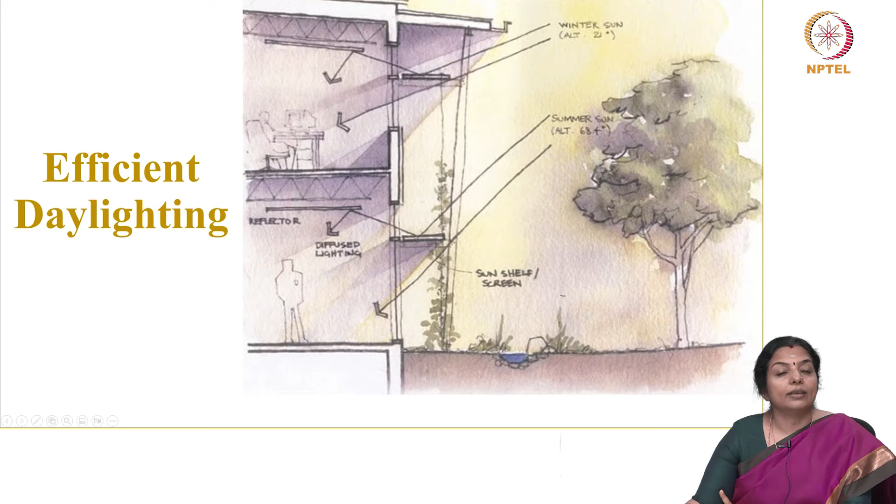Today we will look at some of the case studies in India where the intent of design itself was to provide efficient daylighting. So the first case study that we will look at is the Indira Paryavaran Bhawan in New Delhi. The Indira Paryavaran Bhawan is a 5-star rated GRIHA green building. It is located in New Delhi. It has been designed to be a net zero building and is considered a perfect example when it comes to looking at the latest green technologies.

Almost 75% of the building and its floor space is lit with natural lighting. This reduces the dependence on artificial sources of lighting, and therefore this building becomes a net zero building. The inner courtyard of this building serves like a light well, and this courtyard is provided with a skylight. That skylight is shaded and it becomes like an interaction space.

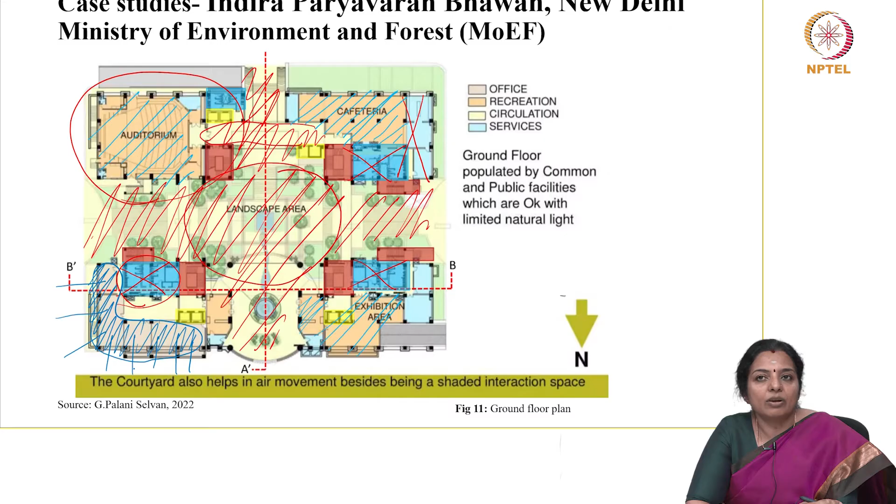Also, they have energy efficient lights provided in the interior as well as the exterior lighting system of the building, and to maximize energy efficiency in lighting, the artificial lighting in the building is regulated by a lux level sensor. The lighting power density is kept close to 5 watts per meter square, which is 50% more efficient than the ECBC requirement on lighting power density, which is 11 watts per meter square. The lighting load, whatever is required, is supplied with the help of photovoltaic cells through a power plant.

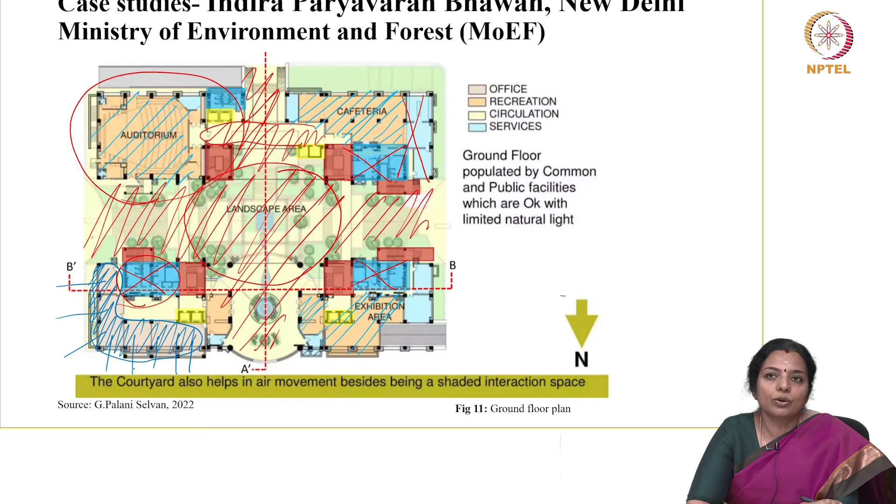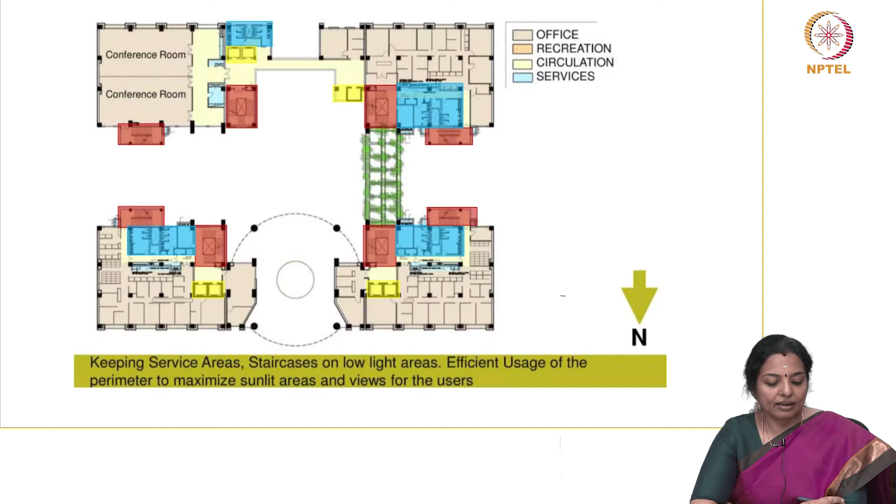This is the higher level, and at the higher level you can see that there are more office spaces and spaces which rely on natural ventilation and natural lighting, and all these spaces have access to the exposed outside wall through which they get natural lighting, and all these are windows through which the office areas get natural lighting. Besides, this is a large cutout here which provides adequate lighting and ventilation.

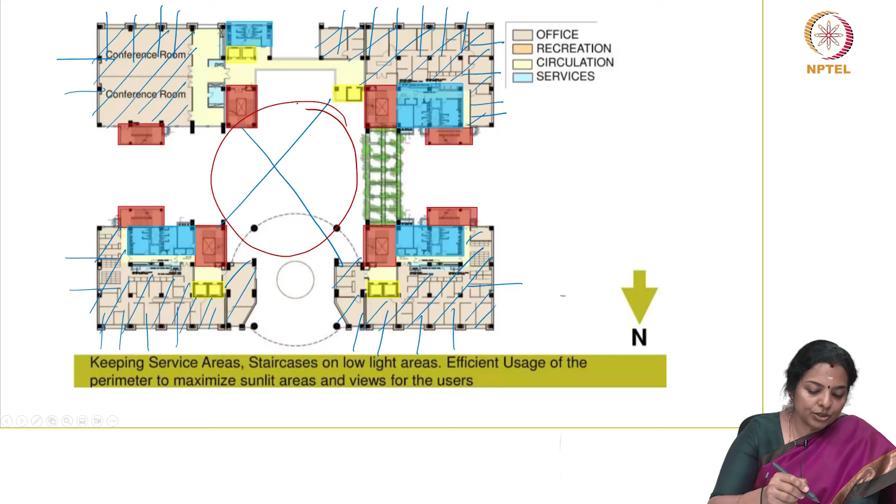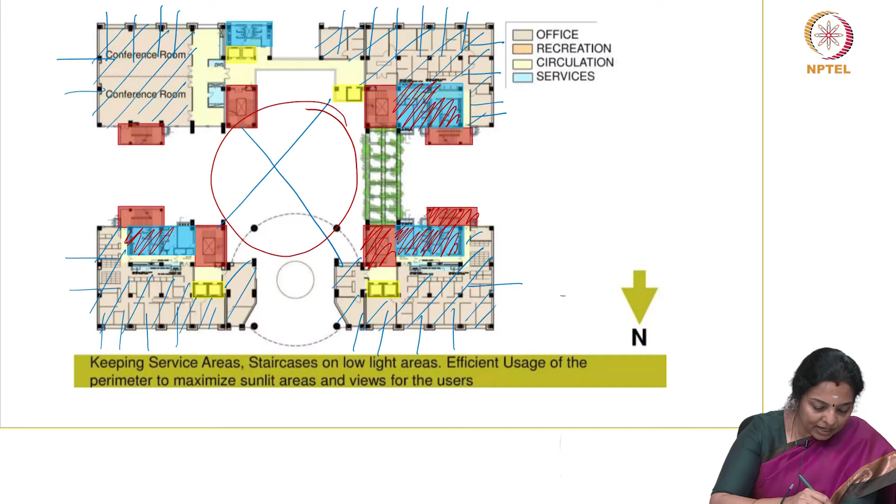This is the courtyard through which all other spaces get natural lighting and ventilation. You can see the staircases and service areas. Service areas are the toilet areas and the staircase areas. They are kept in areas where low levels of natural light enter, which is all right. So this building has efficiently used its outer perimeter, which is a long outer perimeter through which natural lighting enters the building, and therefore it reduces the load on electricity.

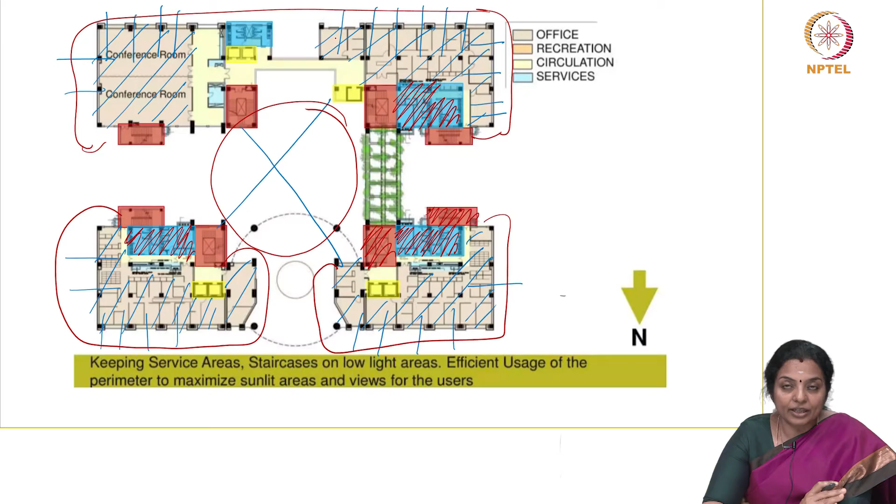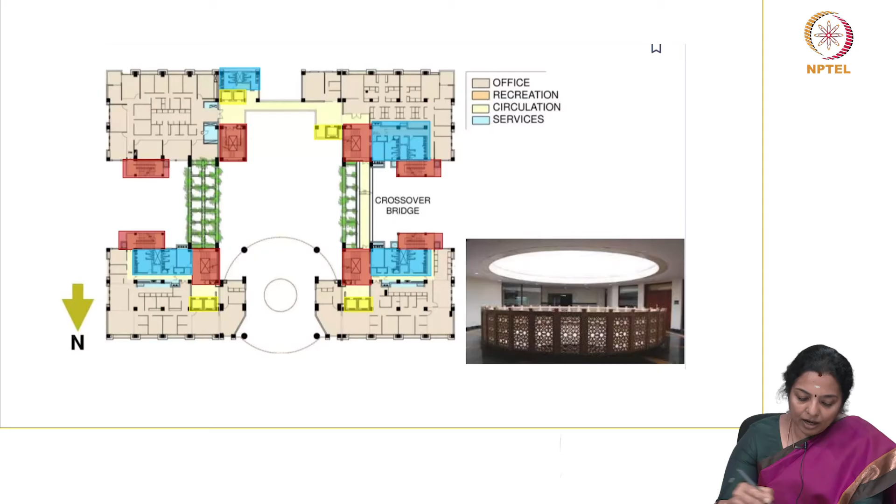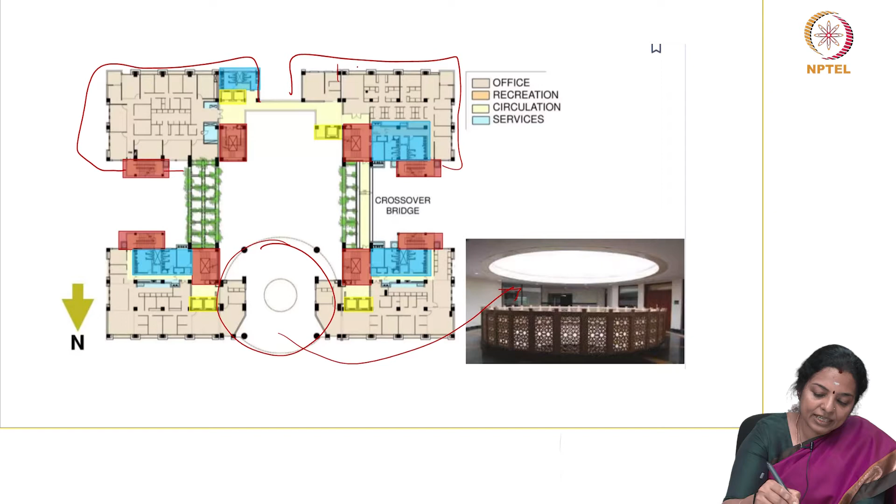On the higher floors, you can see how this area is like a light well, and again here you can see that the long perimeter provides an opportunity for natural light to enter the office, thereby ensuring that the office spaces get lit by natural light and the load on the electricity comes down considerably.

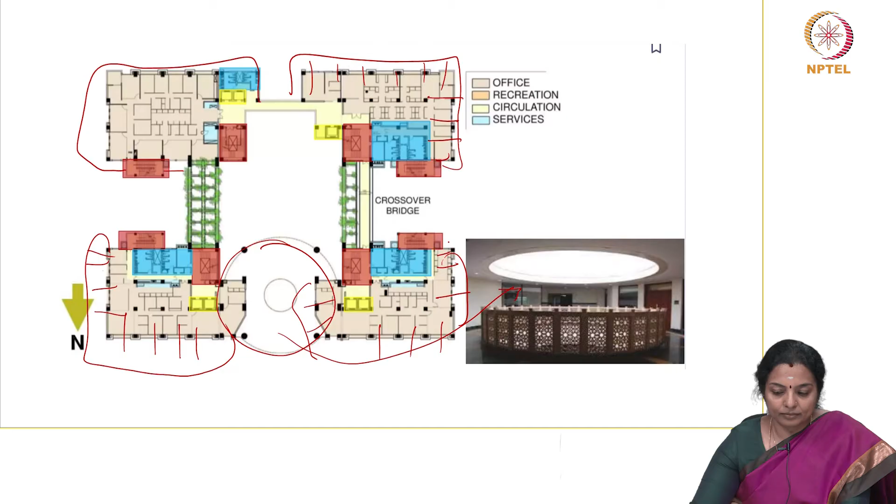Now let us look at the strategies apart from simple passive ones, because with simple passive strategies we saw that the building has a long perimeter which is exposed to the outside, and therefore the office spaces adjacent to those walls get natural lighting. If we look at the planning, we can see that there is a central courtyard and the building is pretty much porous, and this courtyard is provided with a skylight and it provides indoor natural light.

So, the building envelope is designed to ensure that daylight enters the building and at least 75% of the occupied spaces get daylight. So 75% of spaces are naturally lit.

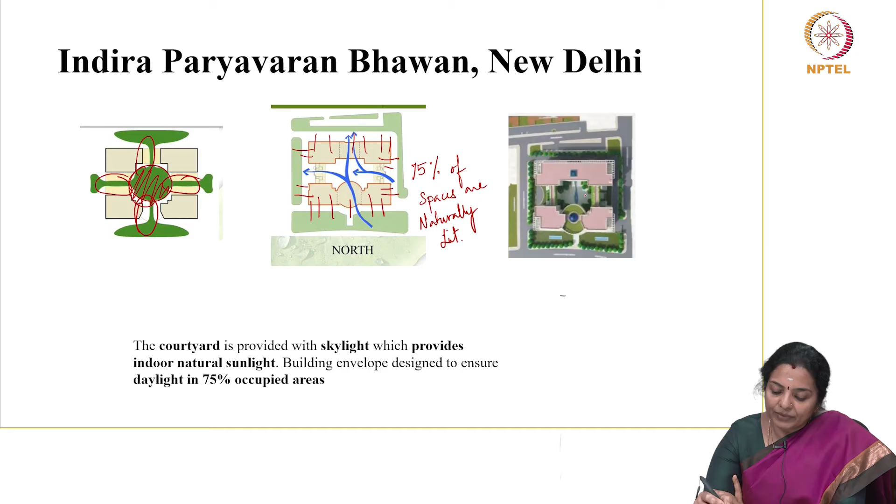Besides, you can see here in this plan that there is this courtyard and there are multiple smaller courtyards here. You can also know that this building has light shelves. We have already seen what light shelves are. This building also has light shelves and it has very simple roof overhangs. So, the roof overhangs are provided, which act as a shading device on the south side of the building.

So, it acts as a shading device and also helps in eliminating glare by cutting off very high and harsh sunlight. So, north facing glazing receives only diffuse light. The light shelves also help in bringing diffused light because it is not direct light but it is through multiple reflection.

The facade has been designed to receive at least 75% of natural daylight inside, and there is use of high efficiency glass. We have already seen what is high efficiency glass in our previous slides. So, it has low U value and it has very high visible light transmission. All these contribute to further enhancing indoor lighting.

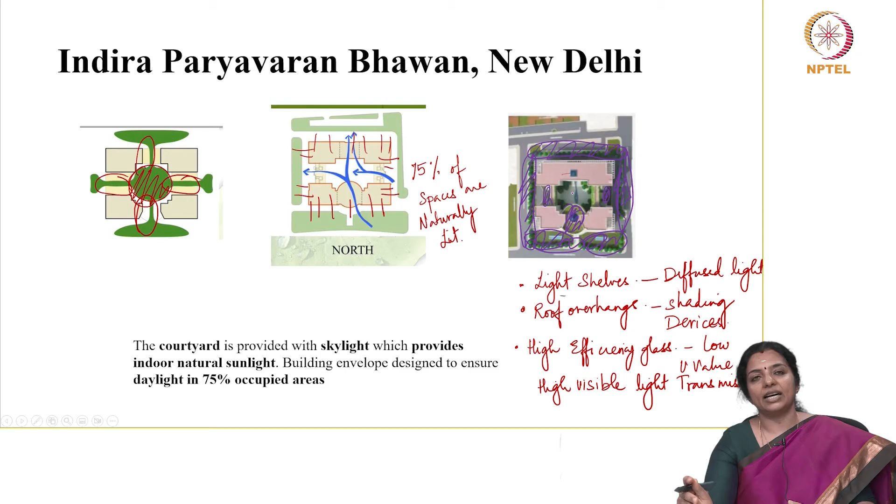Also, the building has very well designed exterior landscaped areas, and having good landscaped areas is very important. The building has very well landscaped areas on the outside as well as any of the surfaces which is not covered, and therefore the intensity of solar radiation is less because it is reflected light which enters the building. Here in this picture you can see the light shelves, which undergo multiple reflection before light enters the building, giving it a very diffused lighting effect.

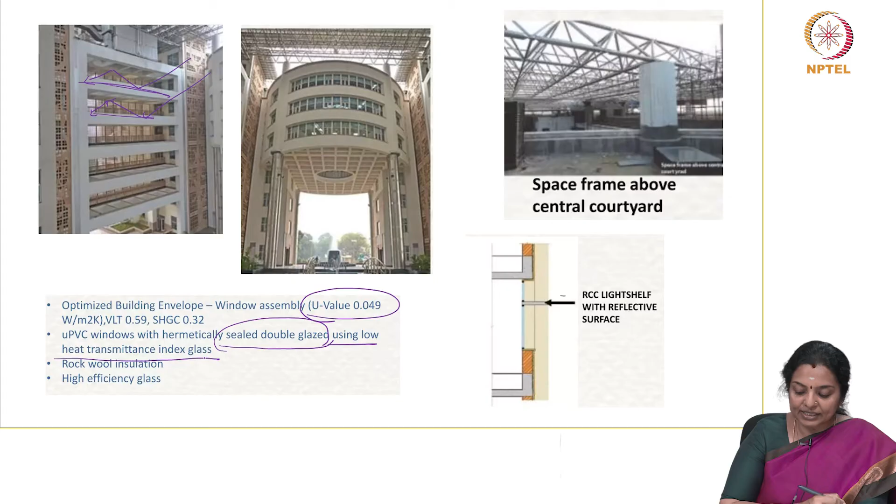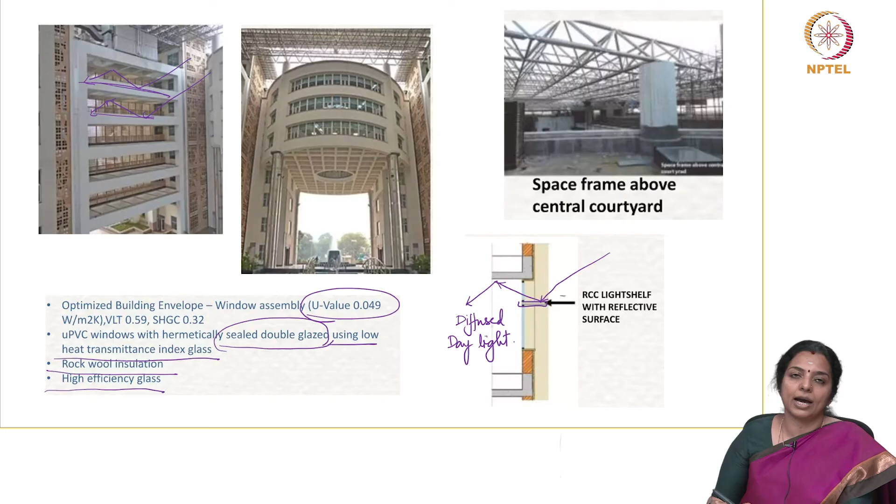Now the building has an optimized building envelope. So the U value is 0.049 watts per meter square Kelvin. And UPVC windows are used with hermetically sealed, double glazed and low heat transmittance index glass. Rock wool insulation is used along with the high efficiency glass, and these multiple light shelves also have a reflective surface which reflects the daylight, and it brings in diffused daylight. As you may be aware, in Delhi the intensity of solar radiation can be very high and the light can become very harsh to the eye if it is not diffused.

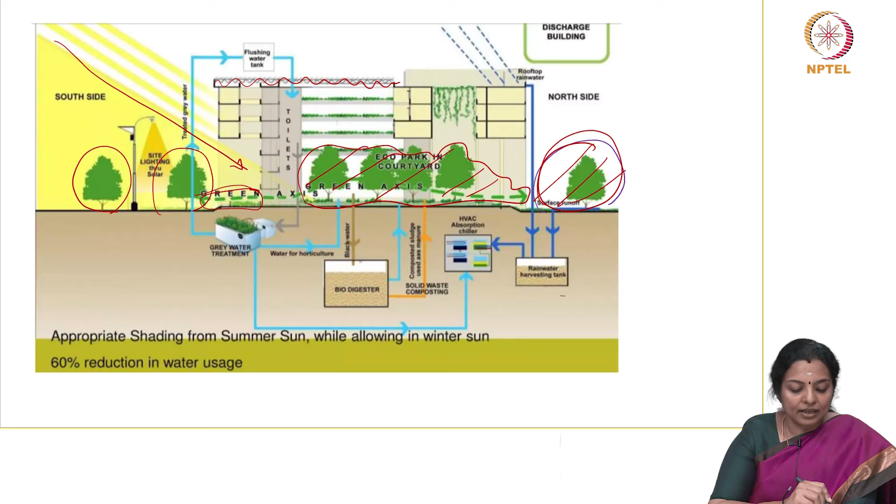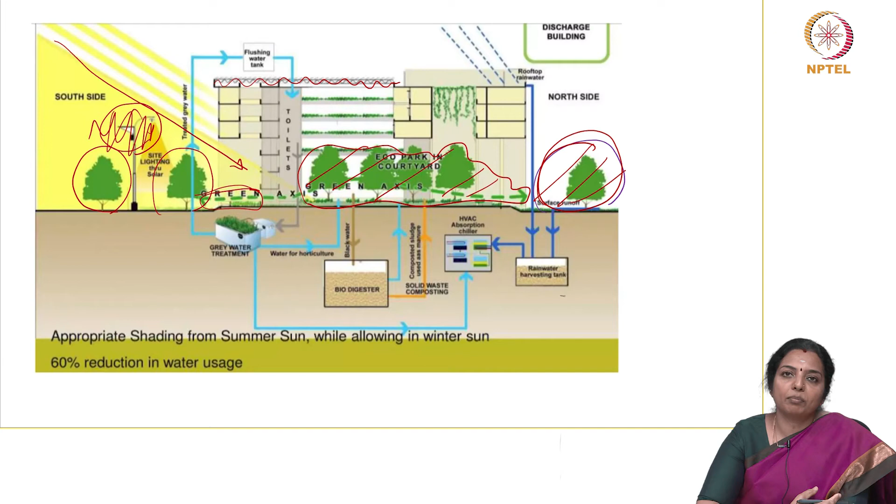Now this is the section of the building, and in this section you can see how the building is very well landscaped. Wherever there is a possibility, the building is very well landscaped, which ensures that the harshness of solar radiation is decreased. You can also see that there is appropriate shading. There are trees here, so there is shading from summer sun, and the winter sun is allowed inside. So the inside as well as outdoor lighting, whichever needs external electricity, the photovoltaic cells help in the interior and exterior lighting for the remaining period or remaining parts of the building.

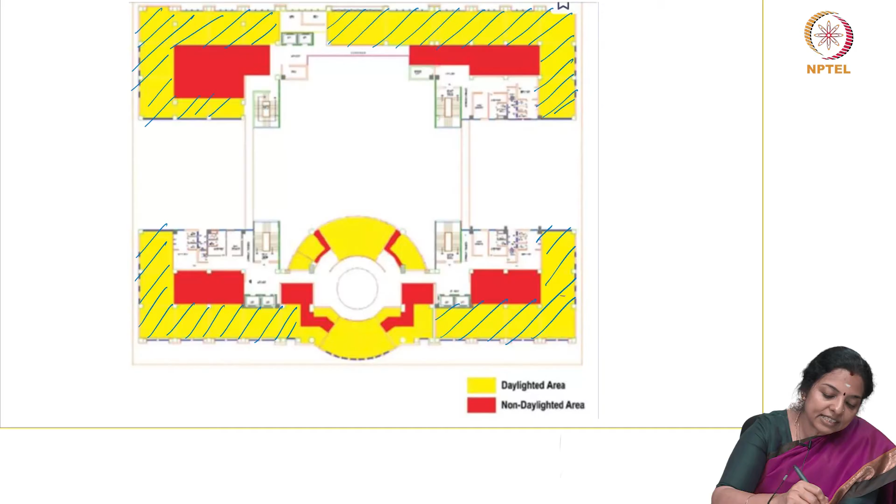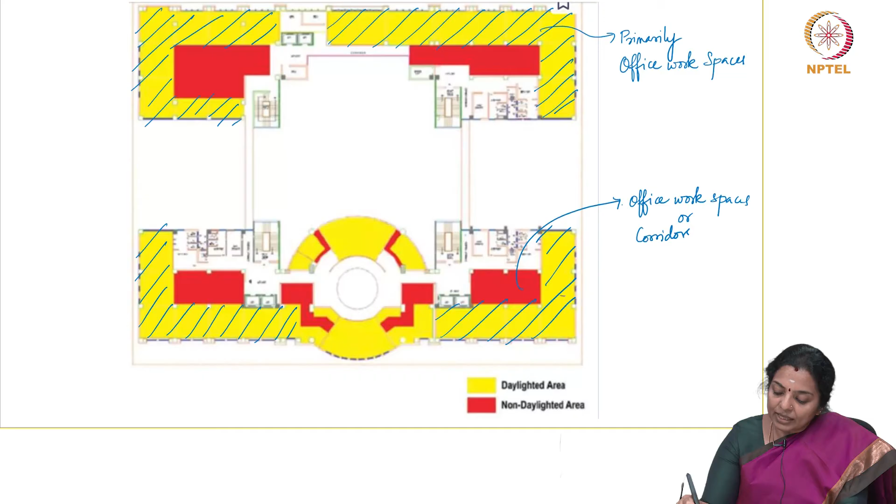Now this picture shows what areas have natural lighting, and you can see that all of these areas shown in yellow are daylight areas where daylight alone is sufficient to light these areas. If you correlate this drawing with the floor plan, you will notice that all these hatched areas are primarily office workspace, and all the red areas are either office workspaces or corridors in the office, and therefore we say that more than 75% of the floor is lit by natural daylight, and therefore it reduces the dependency on active lighting devices.

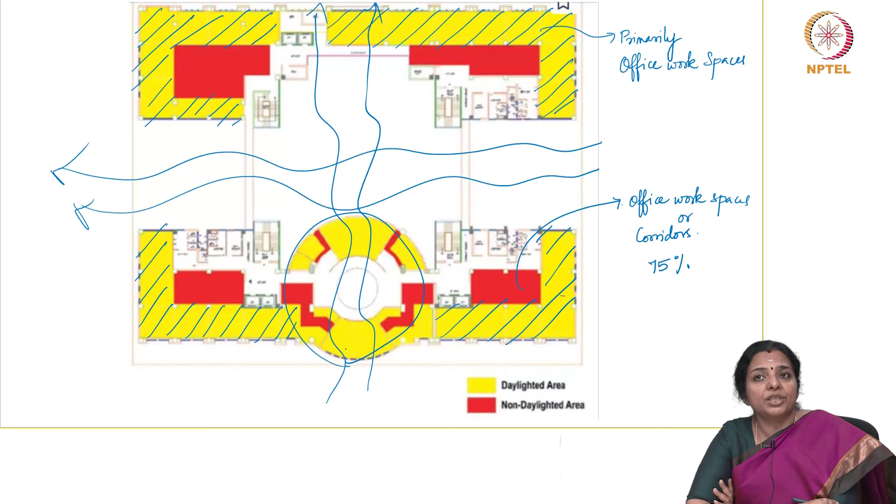This central atrium, which is located between the two blocks, allows natural movement of air too. It makes the building very porous, and there is movement of air, because at the ground floor level there is no block on these two sides. So the provision of windows further enhances the process of cross ventilation. Again, basic principles using high efficient glass, high VLT glass and glass with low U value, along with proper optimized shading, help the building be energy efficient overall.

We will look at another case study, which is the Infosys office at Pocharam, Hyderabad. Now, Infosys has the largest building area as green building rated office space, and it also has the second highest number of LEED Platinum awards for a corporate. This is a green rated building by LEED, which is a globally accepted benchmark for design, construction and operation of very high performing green buildings. And therefore this Pocharam campus is also a green building. It's located on a very large piece of land spread across 447 acres.

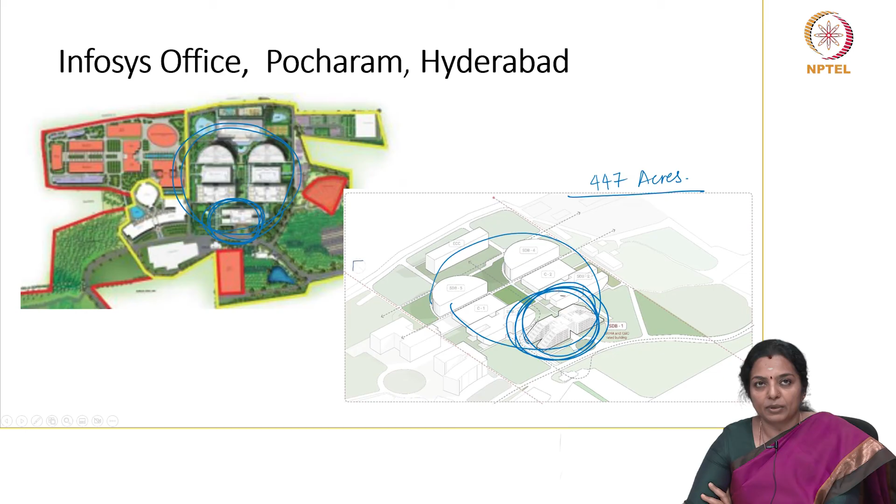This is the basic plan of the Infosys building at Pocharam, and our concern would be largely the office building, which is located here. This office building would be our primary concern. So the total extent is 447 acres on which there is an office building. Now when it comes to daylight, the windows are split into an upper pane that lets in natural light and a lower pane which provides outside view. So the windows are very high and tall, and they have an upper pane and a lower pane.

So through the upper pane there is continuous natural light. The windows are completely shaded, and these are shaded with horizontal louvers and vertical fins too. In this picture, you can see that it has a horizontal shading device and it also has these vertical fins. So this combination of horizontal and vertical shading devices ensures that the entire office has natural daylight without glare.

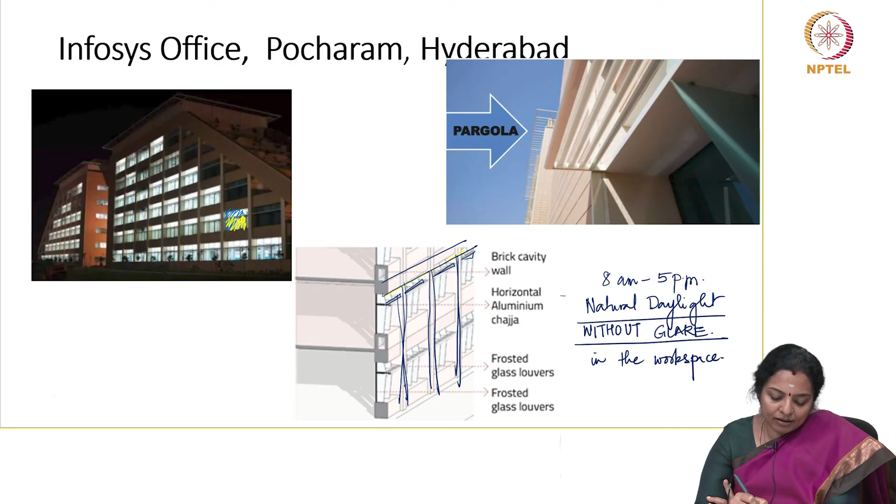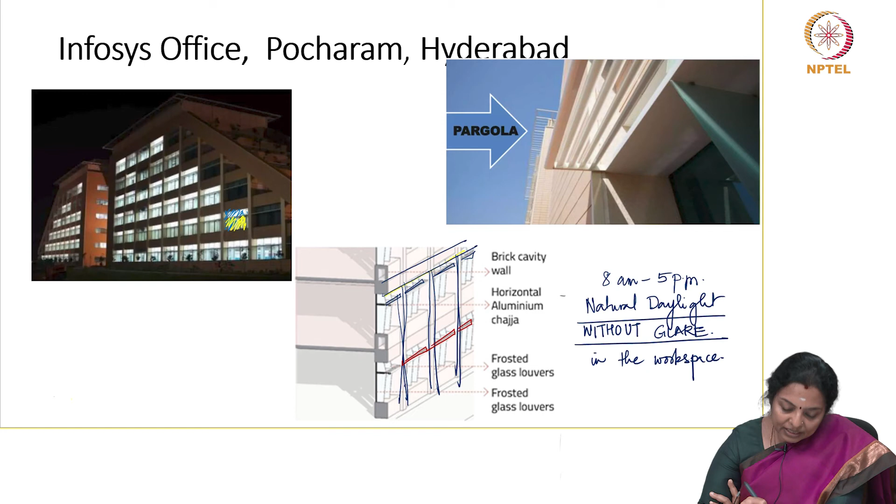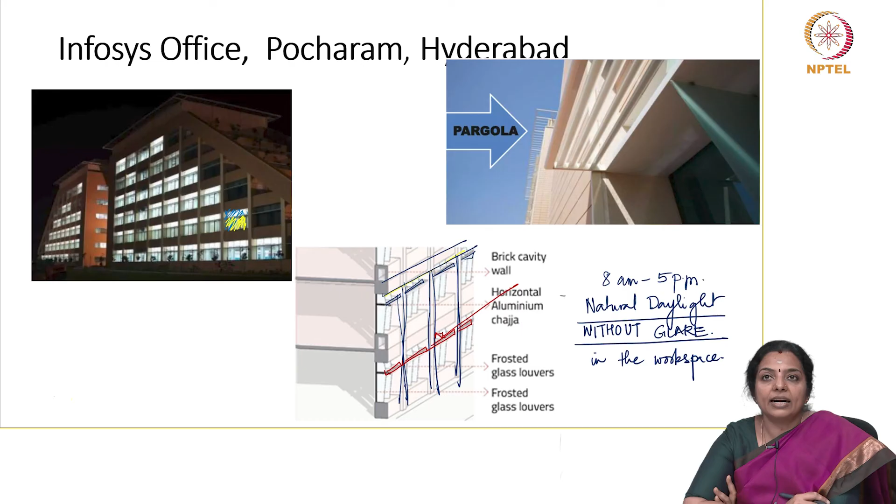Now above each window is a light shelf, which is actually just a flat pane. These are the light shelves. So above each window there are light shelves like this, and these are installed to reflect the incoming sunlight. It is coated with a reflective surface, and it reflects the light onto the ceiling, thereby distributing it deeper into the space.

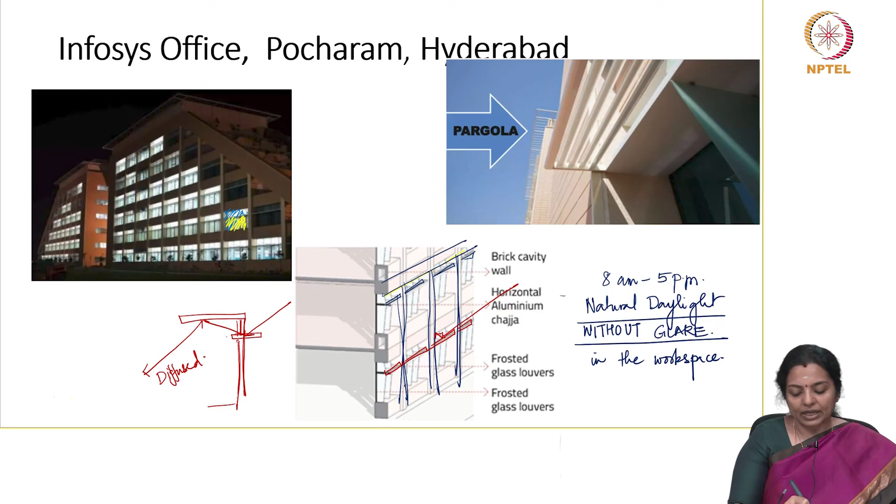You have the light shelf which reflects the light, because the area above the light shelf is also glazing, and it gives diffused, glare-free light inside the workspace. The lighting controls which give rise to green results include daylight panels and vision panels for the windows. The light shelves aid in reflecting the light inside, giving diffused light, and this improved natural light helps in creating good working spaces.

The plan of the building is also such that a large perimeter is exposed to the outside, and therefore the building itself is designed in such a way that it facilitates natural light inside. The building is stepped; it steps inside, and you can see that on the east and western side, these places are all service areas such as toilets. So all the areas which are exposed to the harshness of the sun along east and west are service areas.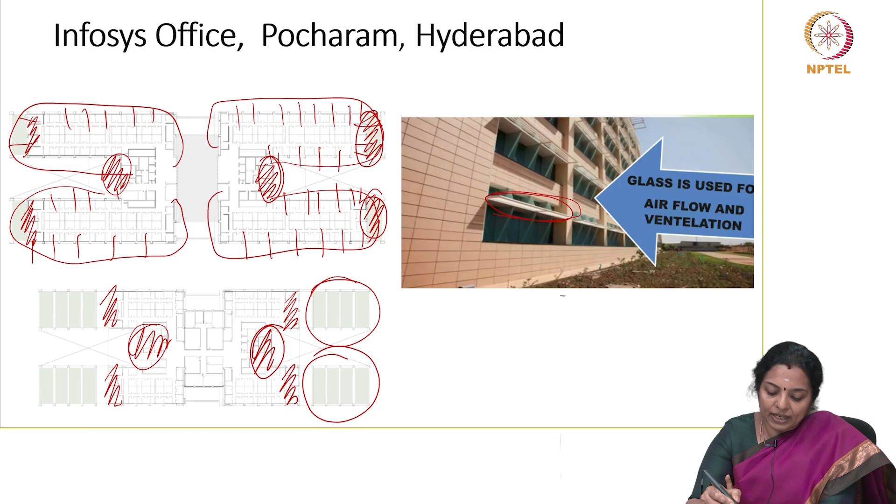So the windows are split into two types of glass. The upper glass is called the daylight panel, and it gives natural light with less glare. This part has a glass that gives less glare. The lower glass is called the vision panel, and it has low visible transmittance. These windows conserve energy as they allow less heat inside the building, but they allow ample daylight.

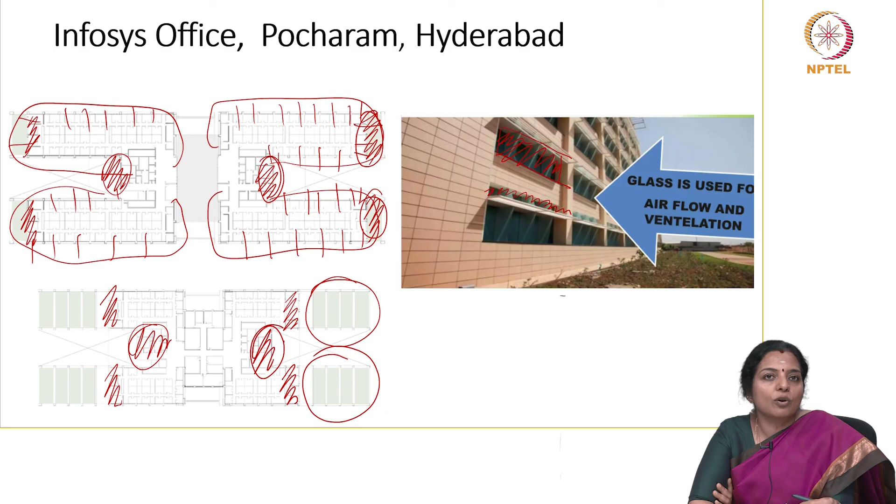Since these are larger windows, they have glass which will allow more light and cut the heat. Besides, you have light shelves, an overhang fixed between the daylight panel and the vision panel, extending both inside and outside the building. It helps reflect natural light deep into the office spaces and provides maximum protection from glare. So they have achieved a reduction of at least 40% in energy intensity just because of the way the building is planned.

You can see in this picture clearly how every window is made up of two parts: the upper one where diffuse light goes in, and the lower one which cuts the heat but allows ample daylight. Besides, you can see the light shelves too. So the building has been designed with a highly efficient daylighting system, and it has removed the need for any artificial lighting during the day in this office. This has been done, as I repeat, with the light shelves and narrow floor plans, which allow the building perimeter to take in as much light from outside as possible.

Now, for daylight savings, a number of features have been included to maximize daylight harvesting, which leads to the attainment of 90% natural light in the office space. The design itself was conceptualized to make the interiors look brighter, and therefore, as I had been telling, decisions at an early design stage are very important to ensure that the operational carbon and the embodied carbon are reduced. Because once the building is done, it's difficult to retrofit it. One might as well think ahead during the early design stage to have a proper plan which will ensure energy efficiency of the building.

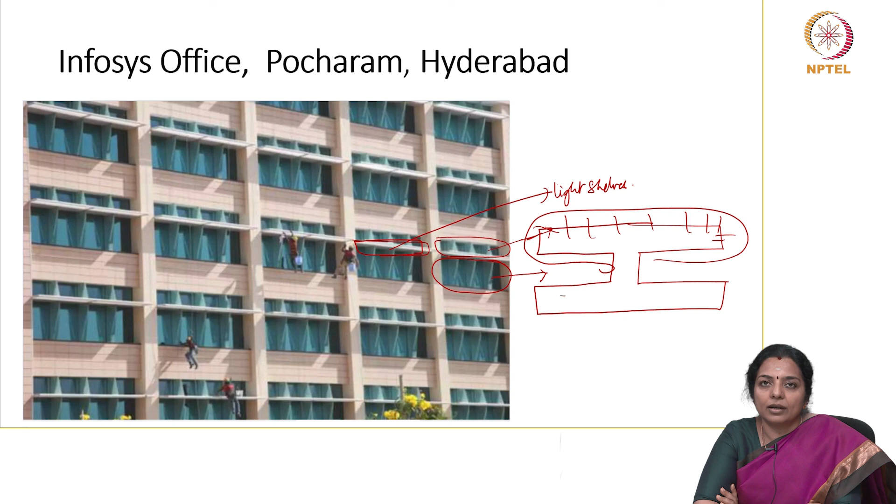So we will stop today's class with this, and we will continue next time with another set of case studies which show how daylighting can be enhanced by virtue of design, helping us cut the demand on electricity for lighting.